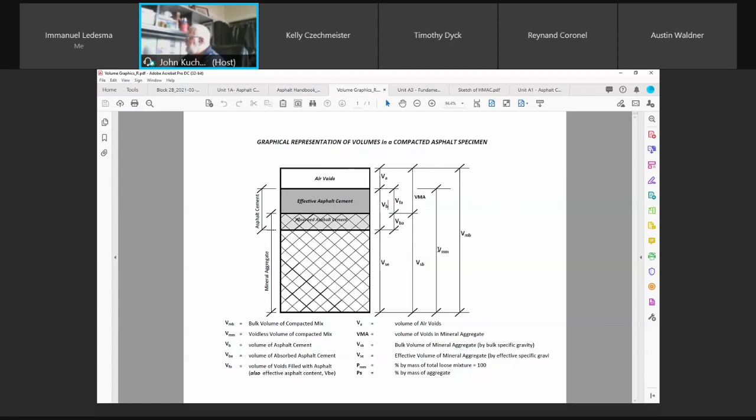Okay, so we're kind of looking at it - it's sort of the same type of matrix that Portland cement would have. You're going to have aggregate, you're going to have cement paste, and you're going to have air, pores, voids in concrete.

For asphalt, it's very important - the aggregates, again like Portland cement, are key. If your aggregates for asphalt cement are garbage, your mix is going to be garbage, it's not going to perform. We're going to be looking at the proportions of aggregate in an asphalt mix versus the proportions in the Portland cement mix - they're actually the opposite.

Remember, we've always strived for more coarse aggregate in Portland cement concrete than fine aggregate. For asphalt, it's flipped around - you're going to have less coarse aggregate than you will have fine aggregate.

It wasn't ideal to have crushed, sharp, angular particles for Portland cement concrete because it's a harsher mix. It would need more water for workability and more paste, so it didn't really contribute that much to compressive strength. It might have given you a little bit better bond between the aggregates and the cement paste, but it was a harsh mix, so it's not key to have sharp, angular, rough textured aggregate in Portland cement.

However, for asphaltic pavement concrete, you do need that. If you don't have sharp, rough, angular edges and aggregate in a hot mix, you're not going to have a stable mix - it's garbage. So again, now we're looking at something a little bit different as compared to Portland cement.

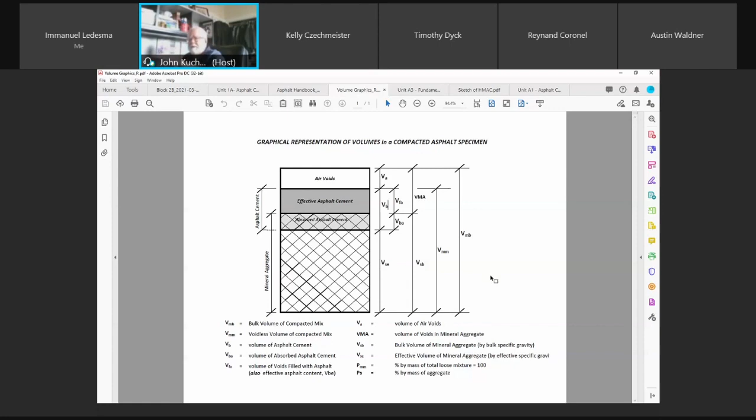We know essentially the two ingredients, aggregates and asphalt cement. So let's look at the asphalt cement. Any questions so far? Okay.

There's a fair amount of history, just like there is in the first use of Portland cements way back in the late 1800s. Same with the asphalt cements, the bitumens, the binders. Goes way back to the Greek days. There's a little bit of history on it, but I'm not going to get into that because you can read that on your own.

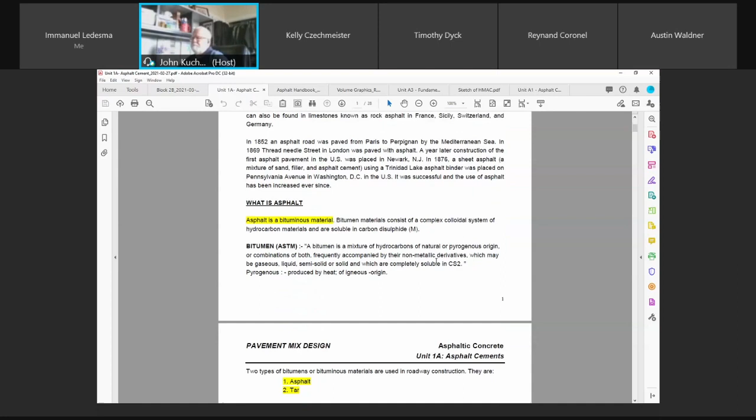But there are various definitions of asphalt. It's a bituminous material, or bitumen materials, if you want to call it that. They're made up of hydrocarbons, byproducts from the distillation and refining industries of crude oils. Here is an ASTM definition.

Tars were originally used way back, but now that we can obtain asphalt cements from the refining industry or distillation process of crude oils, we draw off different types of lubricants and petroleum products, and then we're left with the sludge, the residue, bottom of the barrel, as they're sometimes referred to, because that's what it was. And that is asphalt cement. We can add certain solvents to it and make it better to our liking, and we'll get into that.

So if you look at an ASTM definition, it's a black to dark brown solid or semi-solid cementitious material. We refer to it as cementitious because it is a cement, asphalt cement, which liquefies when heated. You know that your motor oil, if it's really, really stiff on a cold day, if you warm it up, it's going to be less viscous. It's going to flow more.

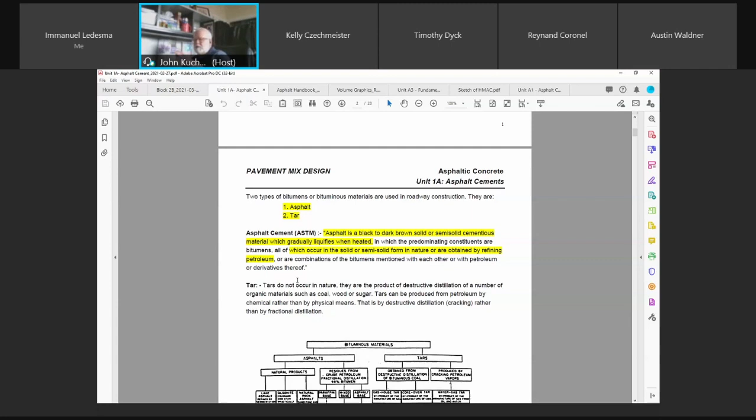Now that we can refine our crude oils, we can make and adjust the properties of the asphalt cements. This is just a little flow chart as to what happens. Don't worry about it, just for your need. Okay.

Asphalt cements. Before the advent of the petroleum industry, tars were the most common type of bitumen used in roadway construction. Okay, bitumen. In North America, asphalt cement is one of the refined byproducts from crude oil. And that's one of the things we do when we're refining crude oil for our fuels, gas, our diesel fuels, our naphthas, lubricants, oils for the industry. We're left with the residue.

Asphalt cement can be obtained from two main sources. They occur naturally, and as we said, we're obtained by refining petroleum. This is just a little bit of statistics. This could change, obviously. We know that we use a lot of bitumen or asphalt cements in paving, roofing materials, your shingles, any asphaltic shingles that you use on your roof. Okay, obviously we use that. We use the crudes and we use it to make shingles.

As a matter of fact, we're going to look at the City of Winnipeg specification now for asphalt cements and asphalt as we did for concrete, Portland cement. And now, as of a few years ago, the city allows a certain amount of asphaltic shingles to be used in asphalt.

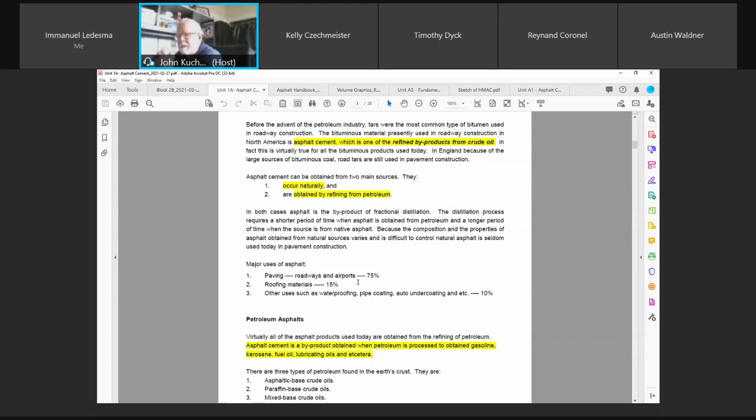And I noticed in that clean aggregate, after we withdrew—as you guys that worked in the industry may say, as we did the burn off, well, back then we used trichloroethylene, we dissolved the asphalt cement, we're left with clean aggregate. There were little round rubberized pellets. The consultant failed to tell me at that time, when we sampled the asphalt, that it was a recycled mix.

And in it, they had crumb rubber, keeping it out of the landfills. Why not use it? There's been some research done, and even some applied research projects, your group as a matter of fact, where they used crumb rubber in Portland cement concrete at a certain percentage before it became detrimental to the performance of the concrete. But if you can use a certain percent and it doesn't take away from the physical properties, why not use it? Why not bury some of it in the C base? Why not bury some of it in the A base?

Done that. We've done that with colored glass. Highway 52, between Highway 59 and Steinbach, as you go through Mitchell, there's a section of pavement where, when I was with highways, we actually buried 25% colored glass into the C base. Behaves excellent. Why not? Glass is one of the biggest culprits as far as trying to keep the environment clean, because it doesn't decompose. So crush it, bury it in the C base. If it has no detrimental effects, why not?

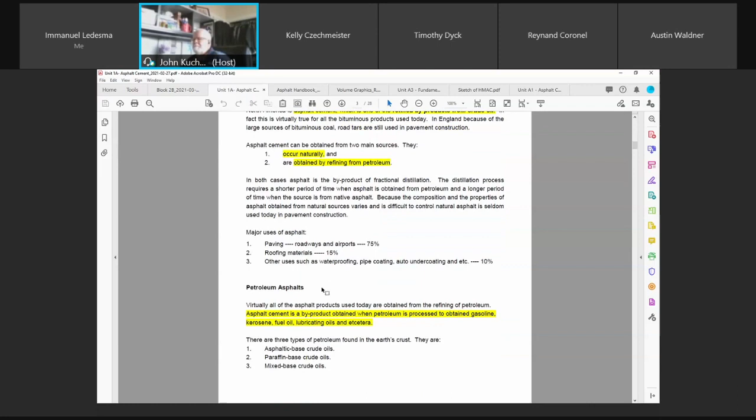Okay, so same with this. So we're looking at various products, like asphalt shingles. Any questions so far?

Virtually all the asphalt products used today are obtained from the refining of petroleum. Petroleum is processed to obtain gasoline, kerosene, fuel oils, lubricating oils, and other products. I hate the term et cetera, because what does it mean? Other oils, other lubricants. Any questions so far?

There are three types of petroleum found in the Earth's crust. Not too worried about this right now.

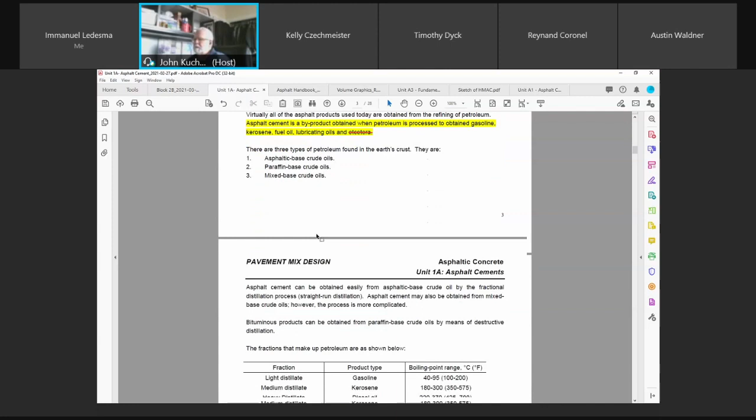So it's called fractional distillation. If you went to a refining plant, you'd see how they heat the crude, and at various temperatures the byproducts are driven off or pulled off. This process works with heat and boiling. Between certain temperatures, say 40 and 95, you're going to get your gasoline coming off. Kerosenes need a little higher temperatures. So when you draw off all your products - your lubricating oils, your kerosene, your naphtha, your diesel oils, your gasoline - you're left with the residue. We're left with the junk, the bottom of the barrel, the guck.

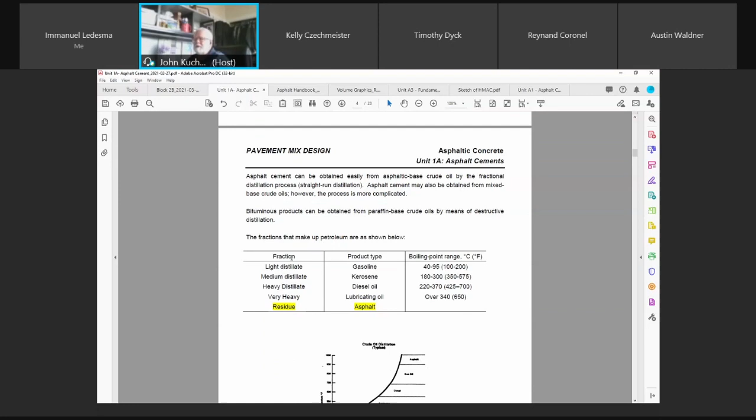Okay, don't use that term - it's residue. And it's asphalt. That's what it is. Take all these off, and we're left with that, and we find that it's got cementitious properties. This is just a chart that tells you the temperature rise. You can see here that at various temperatures, various hydrocarbons are pulled off.

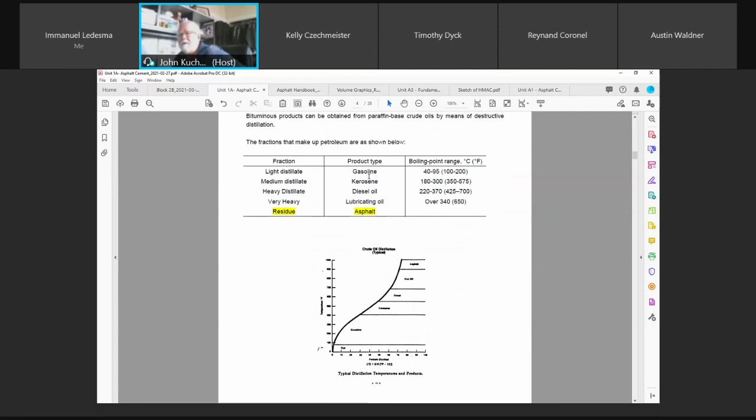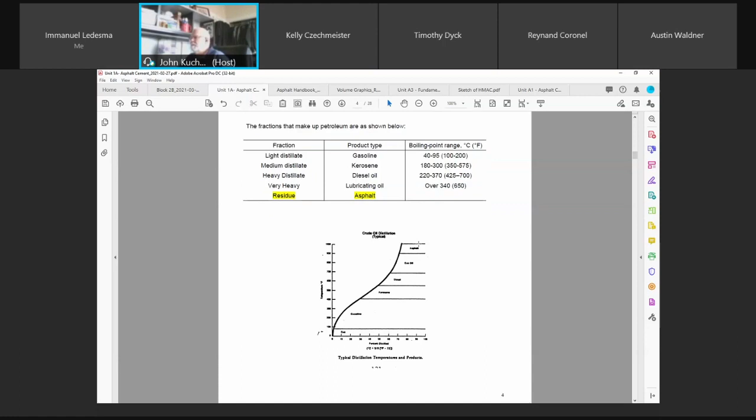And as a matter of fact, some of these are going to be used with our asphalt, and we're going to call what's called cutbacks. We're going to be adding solvents. Gasoline is a solvent, kerosene is a fuel but it's also a solvent. We clean lots of stuff using gasoline - great cleaner, stinks like hell, but great cleaner. Kerosene for burners and heaters, diesel oil for diesel fuels. So we can actually use these solvents and add them to the asphalt cement, and we can change its viscosity, its properties, and then we make a product that we need for various applications in the road building industry. We'll come up to that as we go.

Again, here's a little schematic of refining, just taken out of the asphalt handbook. I had just mentioned something in the asphalt handbook - stop here for a minute, I'm going to pull something up here now.

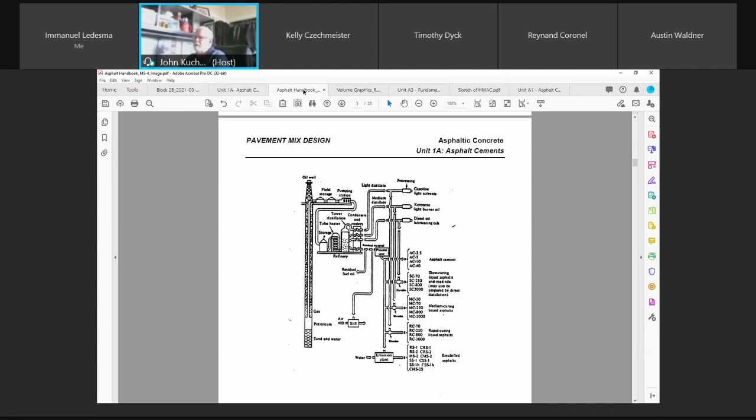Let's have a look - if you get a chance, this is the asphalt handbook, the one I asked last year's students to get, put out by the Asphalt Institute. It's the MS4 series. I have a copy of mine here, but this is it, I just took a picture of it. There's about 800 pages in this textbook. It covers everything from the cements to the aggregates, to the physical properties of aggregates, to the mix designs - whether you're going to use the Superpave mix design method, the Marshall mix design method, the Pavement Mix Design method, or the Hubbard, whatever. It covers maintenance, it covers design.

So this handbook, the latest edition is the 7th edition. Unfortunately, I don't think the Asphalt Institute gives students discounts, but they may. If you were at Red River College, they have this one in the library. But I think last year - Ray, did you buy this book by any chance?

Ray, can you hear me? No, it did not. Okay, it was the year after. I guess I specified last year to buy it, and this year because of it going online.

It is an excellent book, just like the CSA standard for concrete. This one here is also good. A lot of the DOT agencies in the States have adopted their design procedures and construction standards based originally on the Asphalt Institute. Our next design will also be based on the Asphalt Institute. If you get a chance to get a copy of this book, or see it in industry, by all means purchase it from the Asphalt Institute. It's about 180 bucks maybe, a little pricey, but well worth it.

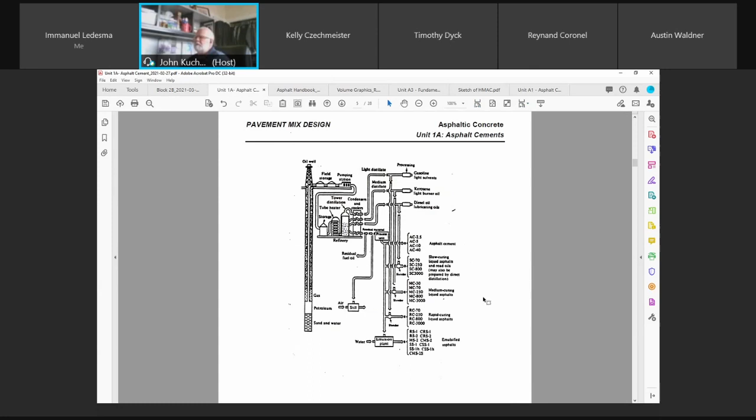Okay, there it is, so we'll go back to this, which is taken out of that handbook. It's just a copy of it.

We're going to get into a little bit of the specifics here on asphalt cement. I'll try to go through it a little quicker because there's a fair amount to cover. There are 3 broad phases, but it's a complex structure of carbon and hydrogen. That's essentially what it is.

There's the asphaltenes, the resins, and then the oils. They give you an idea of the ratio, but as long as you know the asphaltenes, resins, and oils, it's basically a complex structure. We're not going to get into the chemistry of it, that's not what we're doing.

Now, there's a couple of key properties of the asphalt cement that are very important when it comes to pavements, and that's ductility and adhesiveness.

$120 on the website. Good. Okay, I'm way out to lunch then. It's not too bad, 120 bucks. Asphalt Institute. Nice. Okay, good, thank you for that.

So can anybody give me 1 or 2 words to describe ductility? What does ductility mean? Anybody? Ray, you're the expert, how would you describe ductility? Kind of like workability, yes. But if steel is ductile, what can you say if steel was ductile? Deform, right, deformation, elongation, so those are key. The adhesiveness is obviously how it's going to bind with the aggregates. Deformation, elongation, and its ductility - what's it like when we're talking about ductility?

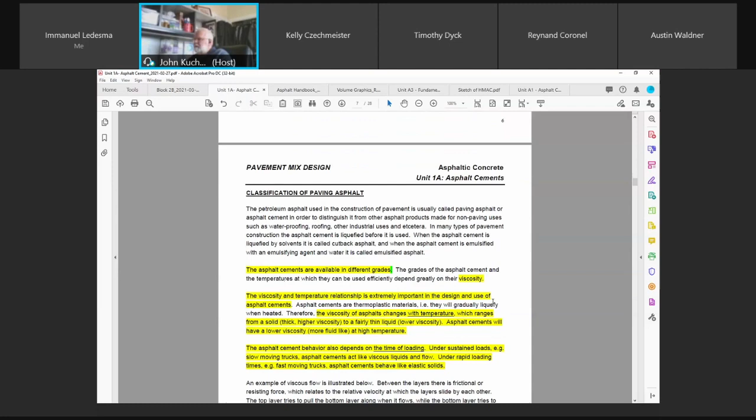I think I'm going to ask you guys about viscosity. If your viscosity is high, is your asphalt cement harder or softer? Would that make it softer, that it could flow better? No - harder. See, a lot of people think that a high viscosity means more fluid. It doesn't. It's a common error. Most people think, yeah, it's thicker.

Viscosity of asphalt cements changes with temperature. It ranges from a solid, thick, higher viscosity to a fairly thin liquid, lower viscosity. Asphalt cements will have a lower viscosity, more fluid-like, at high temperatures. So that's something a lot of people get confused on. Higher viscosity means harder, lower viscosity means more fluid.

Viscosity is defined as the resistance to flow - by gravity. One is actually by gravity, and one would be by imposed loadings. There's two different types of viscosities: we look at dynamic viscosities as one. Like 5W30 summer versus 0W30 winter. Exactly - so in wintertime, your viscosity is higher, not lower.

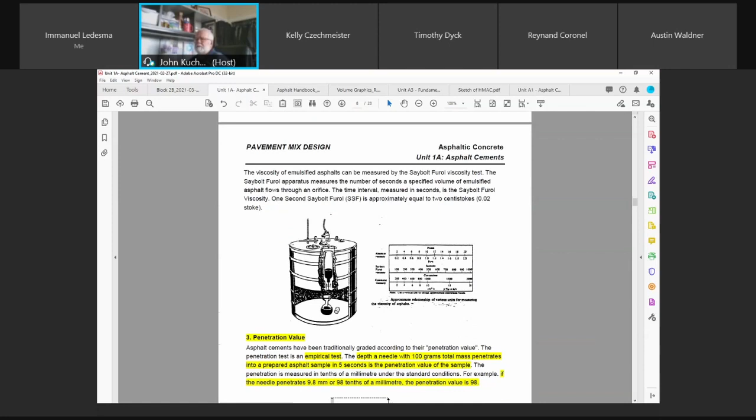Note that the absolute viscosity of a liquid, measured in poises, and its kinematic viscosity, measured in stokes, have approximately the same value. Viscosity after aging is also used to grade asphalt cements. These are the two main definitions, dynamic and kinematic. We want to know what those viscosities are so we can grade our different asphalt cements, and there are numerous ones out there. This just tells you how they do it - don't worry about it, it's a test procedure. I'm not going to ask you to memorize these test procedures.

So we said that viscosity was one way to grade the asphalts, along with penetration. This is one of the tests you're going to have to know why it's done, but you don't have to know the procedures. We would if we were doing a lab, and we're not doing this lab in the virtual labs - we do it during the physical lab.

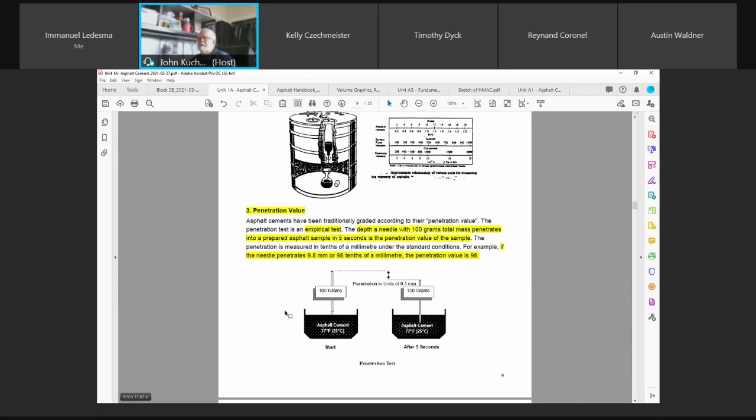This is a form of grading the asphalt cements, and you have different values. You can have what's called a 100-200 penetration grade asphalt, or a 200-300 penetration grade asphalt. The city kind of goes in between with the MI, and they have a 150-200. So now they're sort of blending, and we'll get into that a little bit more.

Essentially, it was a test derived as to how far a needle penetrates the asphalt cement at a certain temperature, with a certain amount of mass on that needle, pushing it in over a certain time. That's the penetration test, and that's how it was graded. So it's an empirical test.

The depth a needle with 100 grams total mass penetrates into a prepared asphalt sample in 5 seconds is the penetration value of the sample. So if you looked at this little sketch, you've got asphalt cement at 25 degrees Celsius. Bring your needle down, it's 100 grams, let it fall into the heated asphalt cement, and it's going to penetrate. The number of millimeters it penetrates is recorded, in tenths of a millimeter.

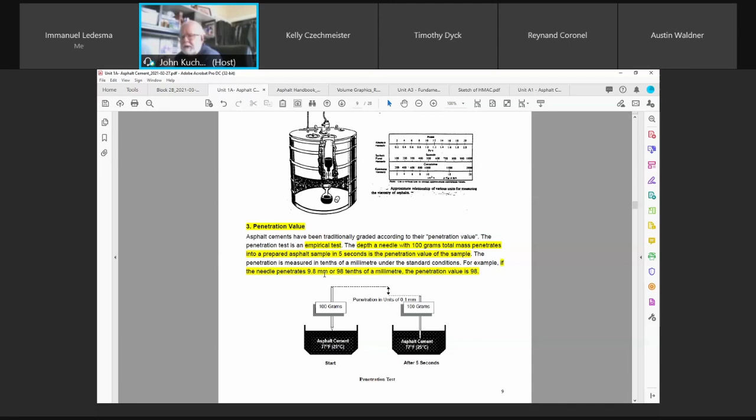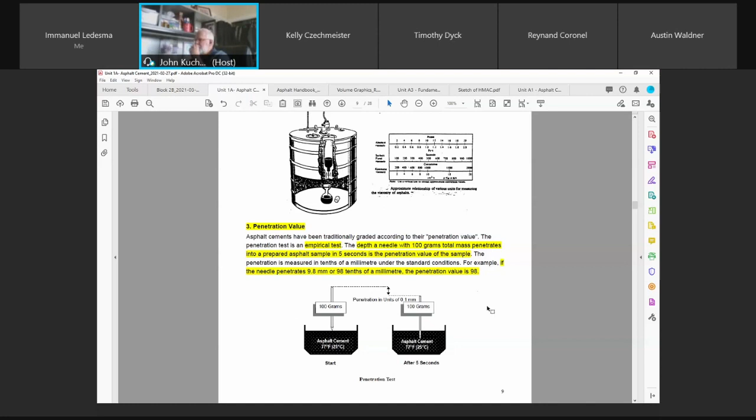There's a flash point that we're going to look at later on. Solubility. So there's various tests that you have to run on these asphalt cements from a quality control point of view, no different than what you would run on your Portland cements. The fineness, loss on ignition, the soundness, strength of the asphalt cement.

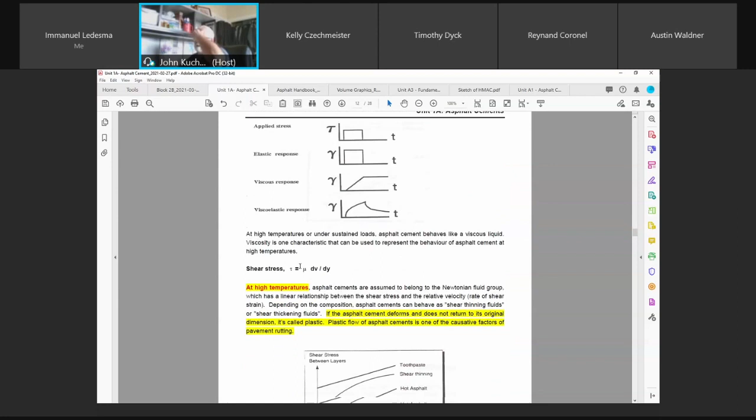It just kind of gives you an idea what I'm going to. A couple of key points here, though, at high temperatures. This is now we're going to just look at the asphalt cements and how they behave. If the asphalt cement deforms and does not return to its original dimension, it's called plastic.

Plastic flow of asphalt cements is one of the key factors of pavement rutting. And you've seen pavement rutting, eh? When you're driving down the highway, especially at areas where there's lots of stress, at traffic lights or at stop signs, one of the worst areas was on the west perimeter, just as you're approaching McGillivray, from the south, you had ruts, the impressions of the wheels. In other words, the asphalt cement was mounded up between the wheels. It's rutted. And that's due to a couple of factors, but one of the key is that it's in plastic.

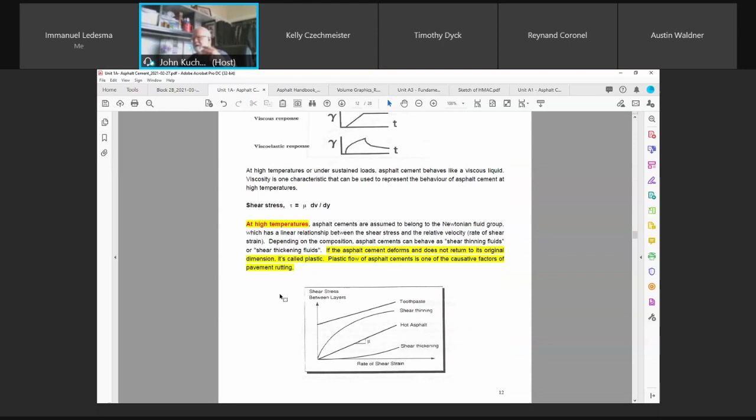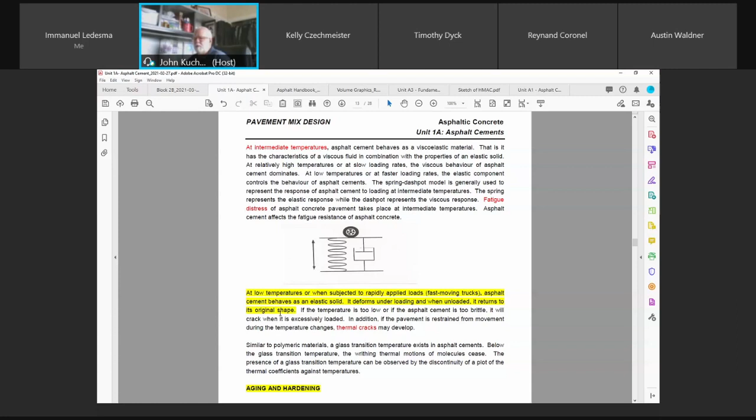So we have various products. So at high temperatures, you know that, well, it's in a plastic state. At intermediate temperatures, more of a viscoelastic, if you want to call it. At low temperatures, or when subjected to rapidly applied loads, fast-moving trucks, asphalt cement behaves as an elastic. It deforms under loading, and when unloaded, it returns back to its original shape. So plastic, it does not. Elastic, it does. That's what you want. You want it to return back to its shape. Make sense?

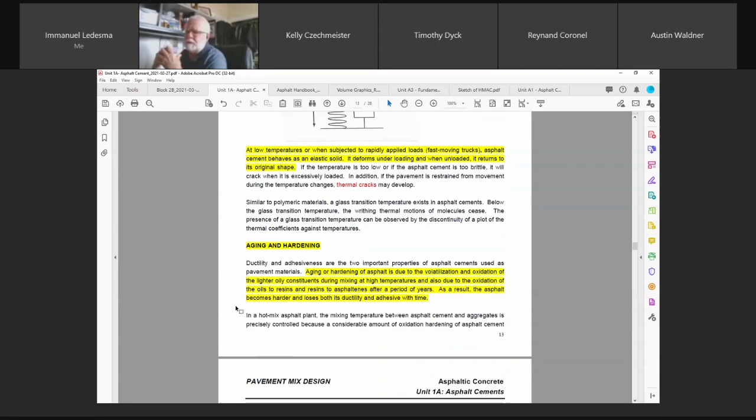So these are all the things you have to consider when you're going to be designing an asphalt pavement. And some of the old methods that we've had are sort of gone by the wayside. We still here in Winnipeg and Manitoba, the province, use Marshall designs of performance grade, penetration graded asphalt. Now I know MI is moving to the Marshall method of design, but using performance grade asphalt cements. So in other words, they're using performance grade to grade the asphalt under that, and we'll see why.

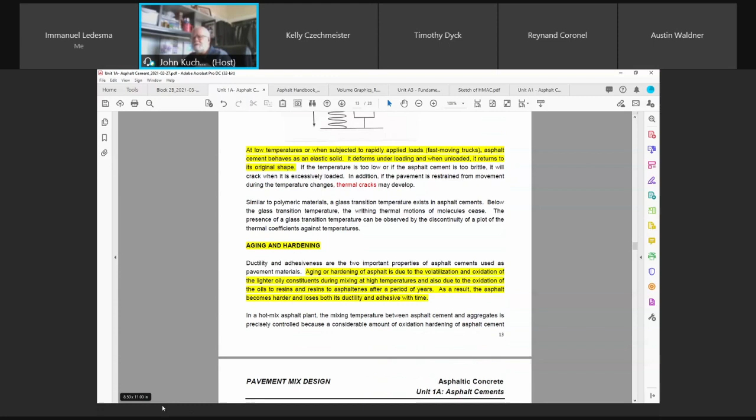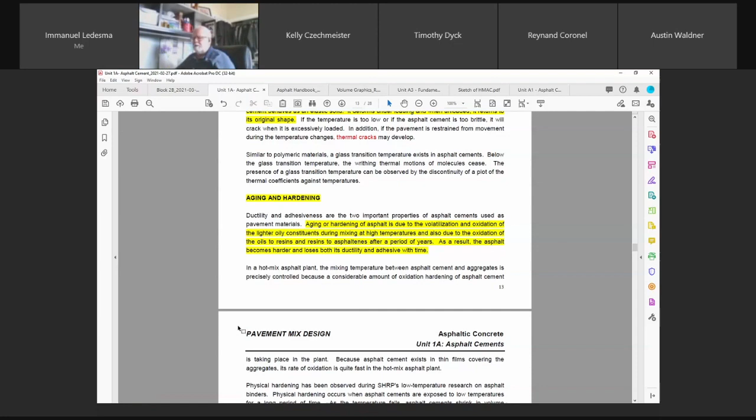Whereas the penetration and the viscosity, the old way, didn't take into consideration the surface temperatures of that pavement, whereas the performance grade will. It's going to look at the minimum and maximum temperatures that those pavements can undergo. We may use a 150, 200 pen grade in Winnipeg, and you're up at Thompson, Manitoba, and you're still using a 150, 200 pen grade asphalt. Well, the service temperatures in Thompson or in Churchill throughout the year are totally different than in Winnipeg, or even Grand Forks. You got to take that into consideration, the service life of your pavements.

Okay, well PG, performance grade, straightforward. 64 and minus 22, what are they? Well, it's the average 7-day maximum pavement design temperature, and minus 22 is the minimum 1-day minimum temperature. So in other words, you're designing a pavement using an asphalt cement that has the capabilities of 64 to minus 22. Now 64 is not that high, but it's an average.

So now when you're in Thompson, you might say, okay, my PG 64-22 may not work because the average 7-day maximum in Thompson may be a lot less. Maybe it's only 50, just guessing, but okay, so that's what it means.

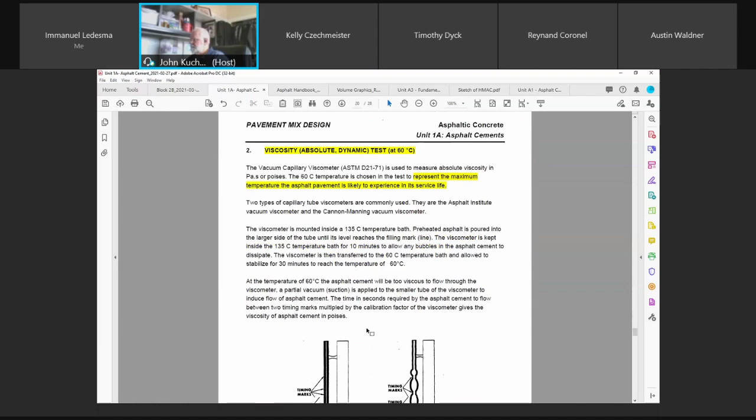Remember, I said, okay, we've got asphalt cements and they have certain properties. Maybe we can't readily use them. Viscosity might not be there for the type of pavements, so we can liquefy, we can change the viscosity. One way of doing it is by heating it, obviously, but that's only going to help during the temperature increases. So we want to cut them, change the viscosity so that temperature may not have so much of a bearing on it.

If your oil was too thick, your cake batter is too thick, what do you do? You add water, changing its viscosity. Well here, because we're working with asphalt cements, adding water is one way, when we're making emulsions.

And we'll talk about that, but the other way is taking those solvents that we let off during the refining, take some of that gasoline, some of that kerosene, some of that naphtha, and mix it with your asphalt cements and you change their viscosity. They're easier to work with at certain temperatures and certain conditions. So it's called liquefying asphalt cements, or cutbacks. We're cutting back the viscosity.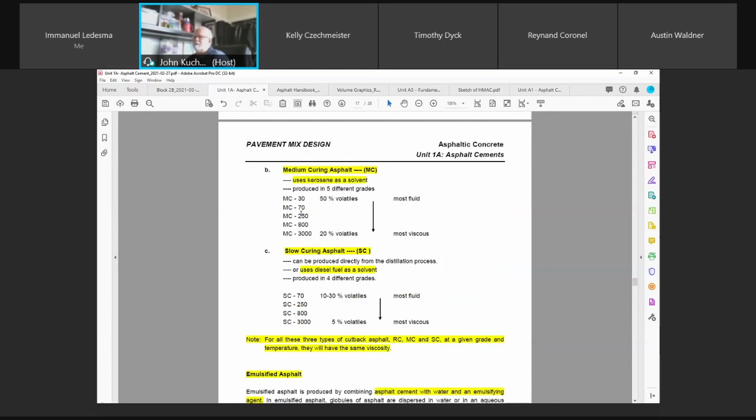Then you use that emulsifier to break it down, you want to change the viscosity. There are some advantages to using emulsified asphalt versus rapid cure. There's what we call flash points, or the breaking time. At a certain time after we place this asphalt cement, the solvents will flash off, the volatiles evaporate, and you're left with that product. You use it to place it, to work it, but after a while it'll evaporate, it'll flash off, and there's a time noted for that, when the asphalt actually changes back to viscous.

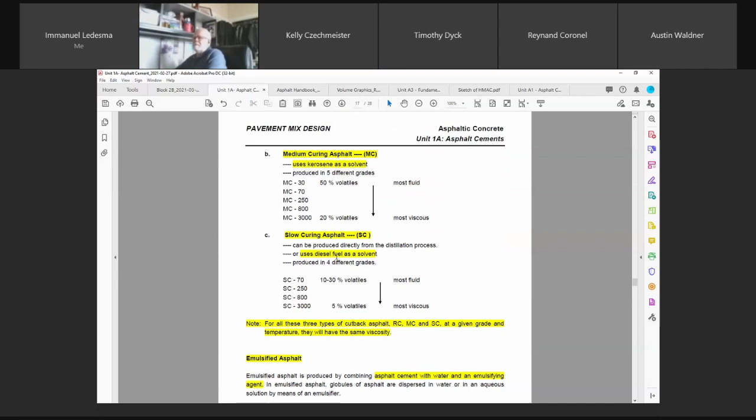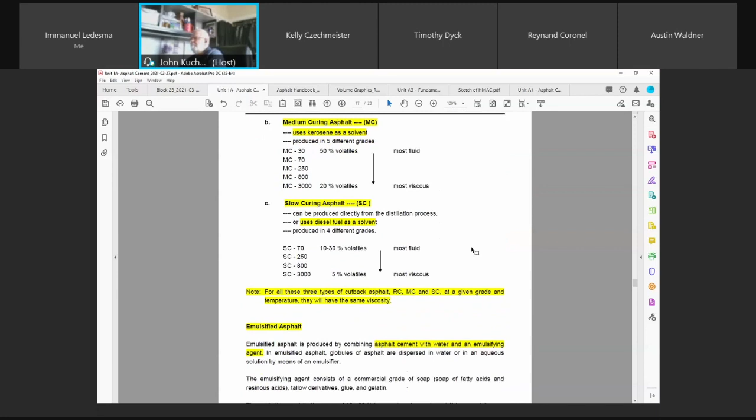So if we're using emulsified asphalts, which one would you rather be standing beside all day long? You're laying down tack coat or prime coat. Would you rather use an emulsified asphalt, or one of these rapid cures, medium cures, or slow cures? Anybody? Why, Margo?

Because it's not as toxic or as smelly. You got it right, exactly that, Margo.

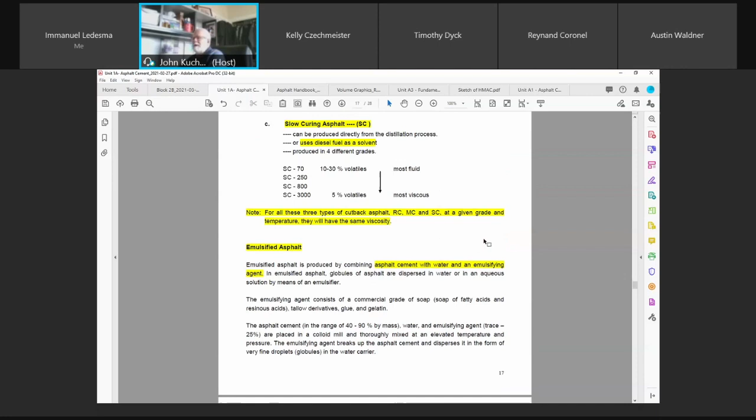If you were on a paving crew, when those solvents flash off, gasoline, after a while if you hang around it too long you'll get headaches because it's flashing off. Well, emulsified asphalts are basically water-based and soap-based, they're not going to harm you. They are more environmentally friendly, so there is a push now. Plus, what happens if you heat solvents up to such extreme temperatures? What's the chance of happening?

Ignition, fire? Exactly, so we're coming up to that. There are three main reasons why emulsified asphalts are more superior. One is environmental toxicity, more environmentally friendly. One is that there's less chance of ignition, it eliminates ignition due to an open flame or a spark off a truck or machinery. And the other is that since they're emulsified and water-based, your aggregates don't have to be bone dry, they can be damp or cool. So working with emulsified asphalt cements makes a lot more sense.

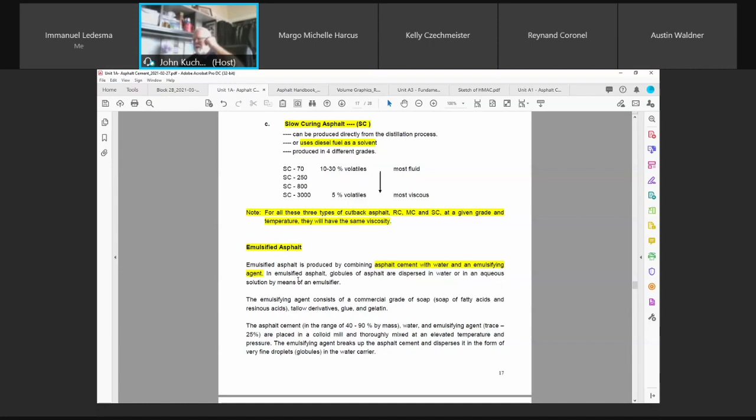But we'd still use both. Yeah, thanks Margo, very good.

They just talk to you about the percentages, but the emulsifying agent breaks up the asphalt cements and disperses it into a form of very fine droplets. That's essentially what we're doing, we're trying to change its viscosity. Don't worry about the cationic, anionic, and so forth.

But this is important: the time required for the water to evaporate, for the asphalt particles to recombine into a continuous film of asphalt, is called the setting time or breaking time. Any of you that have worked on an asphalt paving job will see them laying tack coat down before they pave the asphalt cement. They've got a distributor truck with spray bars on the back, and it rolls out a layer of tack coat.

Essentially, it could be a cutback, or it could be an emulsifying agent, an emulsified asphalt. So you've got to give it some time to break or set up. What happens is, whether it's an emulsified asphalt where the water and emulsifying agent evaporates, or a cutback where the solvents flash off...

Then the pavement goes on it. You don't want the pavement to go over wet emulsified asphalt or cutbacks. It's got to flash off and just become tacky. You're creating a glue, if you want to call it, an adhesiveness.

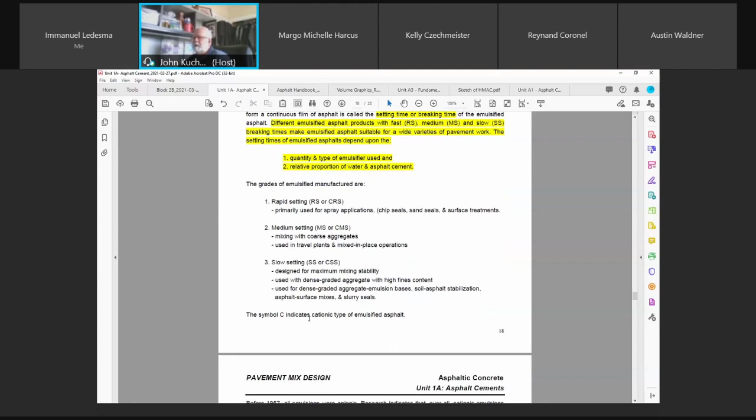Here's the grades of emulsifier: rapid setting, medium setting, slow setting. And the C, if you saw that just tells you whether it's cationic or emulsified type.

And here's the three ingredients, and we're going to take a break here right away. We'll have to try and finish off this next week. I'll try and bring that up with the aggregates.

Advantages of using emulsified asphalt: they can be used either with cold or hot aggregates. Perfect, eh? They can be used with aggregate that is dry, damp, or wet. And it eliminates the fire, toxicity hazards, and the environmental pollution of cutback.

Even when you're not using these cutbacks, just working on an asphalt paving crew all day with the hot asphalt, in the summertime it's a heck of a job to work on. But in the fall, October, November, if you're lucky to pave that late, you'll see most of those workers on a cold October day huddle close to the mat because the temperature coming off a hot asphalt mat, you can feel it. It's a bugger in 30-degree weather during July, but it's a blessing in October, different than built-up hot applied roofs.

Why doesn't the paving crew like using it, Clive? You talking about emulsifieds? I've got a question here. Go ahead, Clive. Let everybody know. Okay, harder to work. Are you talking about the emulsified asphalts?

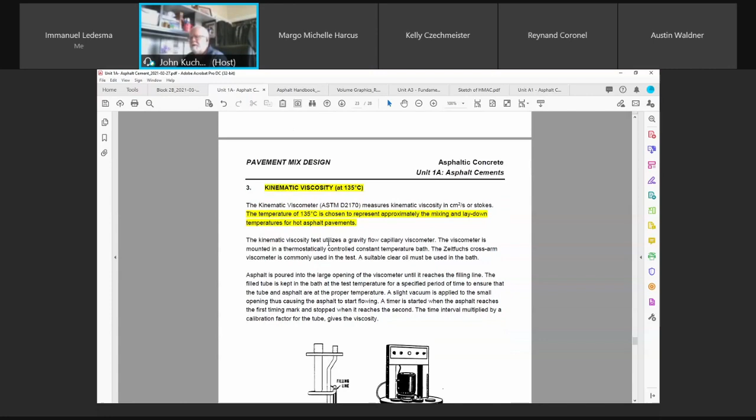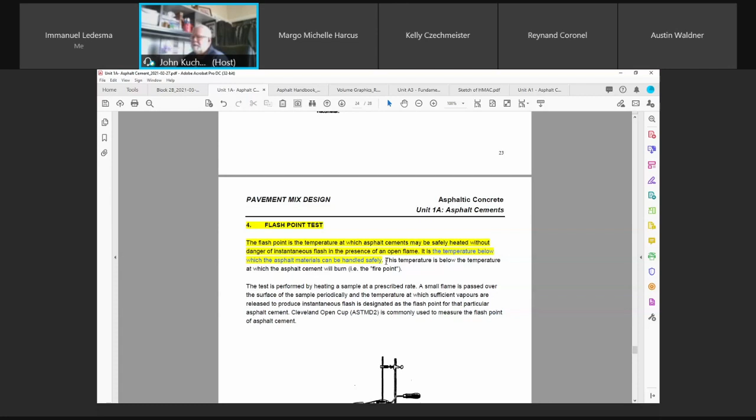Flash point is the temperature at which asphalt cements may be safely heated without danger of instantaneous flash—there's an open flame. If there's no open flame you should be okay, but you never know: a spark, somebody hits the tailgate of their truck or whatever. So it's that temperature, flash point, okay.

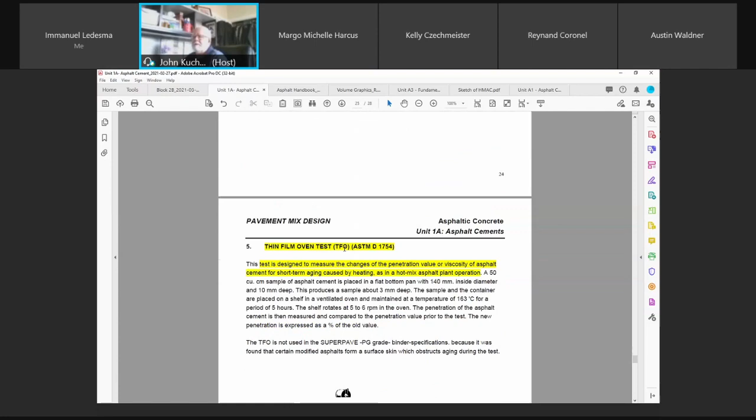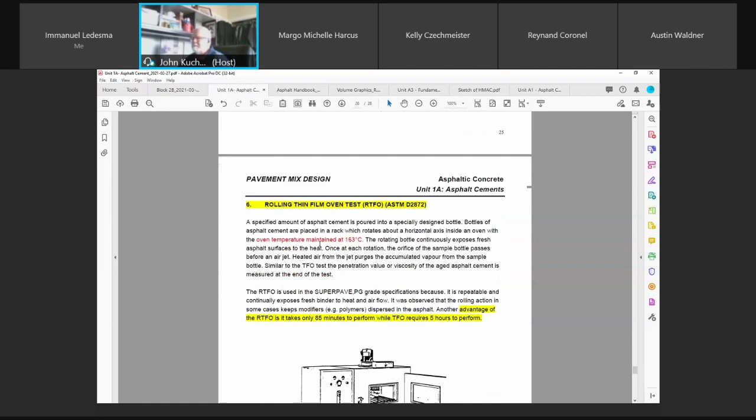Thin film oven test, and the rolling thin film oven test, which is just a different procedure but essentially the same test, for short-term aging. It simulates the heating that occurs at the plant, designed to measure changes in penetration value or viscosity for short-term aging. This is essentially the same thing but quicker to run—the other one takes a couple of hours, up to 5 hours, while this one you can do in about 85 minutes.

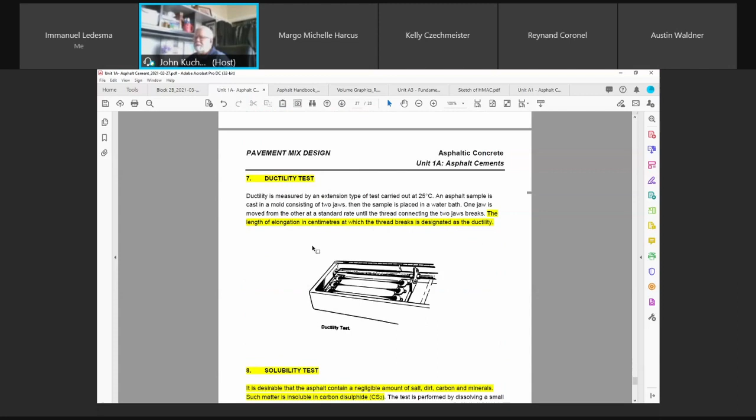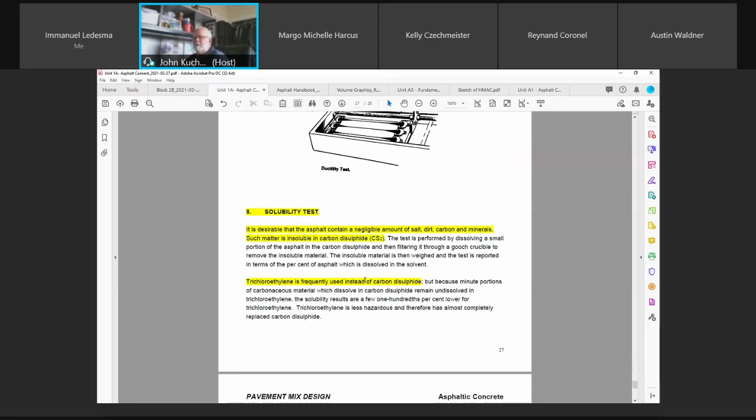Then there's the ductility test that measures the elongation. Solubility test: we use carbon disulfide to see what kind of impurities we have. We dissolve the asphalt cement and are left with impurities, so we can determine what the content is. And then the water and asphalt cement test—we know water sometimes gets trapped in with the asphalt cement.

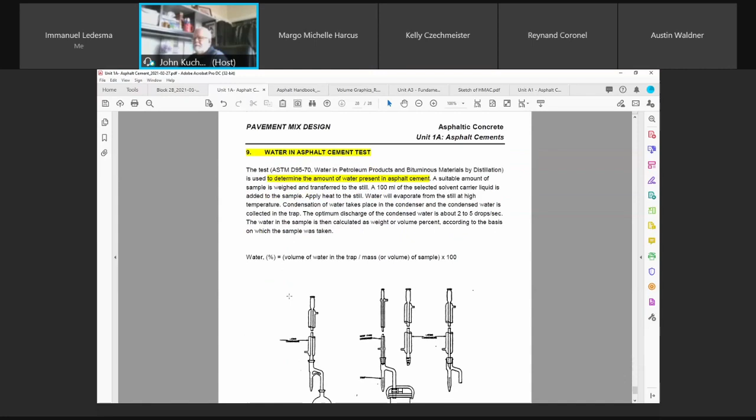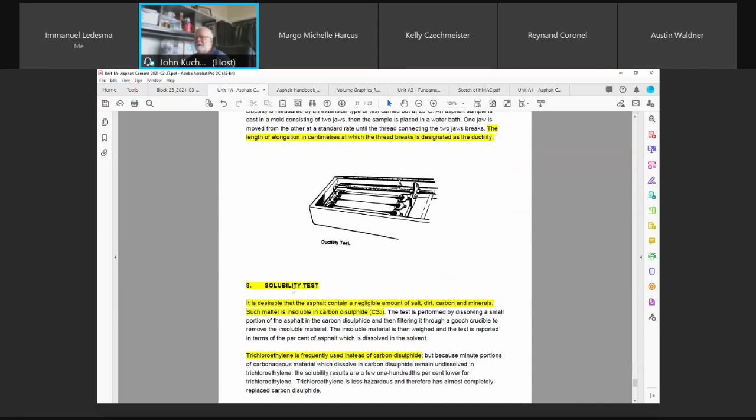Okay, so those are the 9 tests. Know them, and why we do them, but you don't have to know the procedures of how to run the test—that's not what we're here for. Just like there were the 6 tests the cement manufacturer had to do for Portland cement concrete, there are various ones here for quality control to ensure the asphalt cement you're selling, whether it's Husky or Esso or any of the other major oil producers.

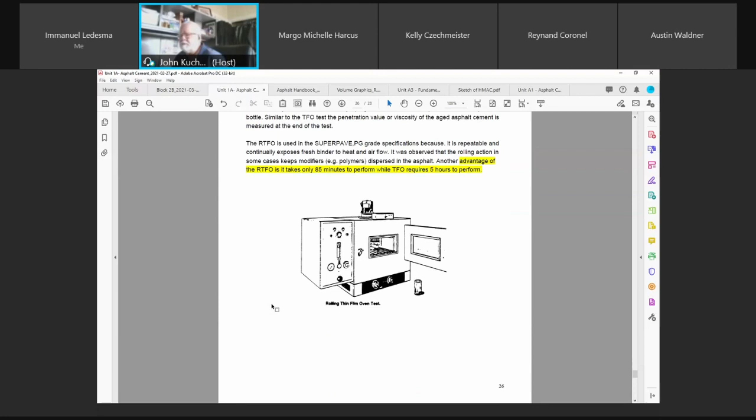It's 2:25. I want to go over the lab, and this lab will be aggregate blending, just like we blended concrete aggregate. This is going to be a little more fun because now you're going to be blending 4 types of aggregates instead of just 2. So let's come back at 2:35. I'll stop the recording, but leave everything as is, and hopefully we can go through that lab quicker since you're already experts on blending.

Any questions on the asphalt cement? I had to go through quickly, guys, we're down to the nitty-gritty here. We've got a fair amount to cover, and hopefully next year we don't have to compress these into 12 weeks—the 24-week course can stay at 24 weeks. So those of you that just want the 24 weeks, just don't graduate this year, and you can come back and have it in 24 weeks.

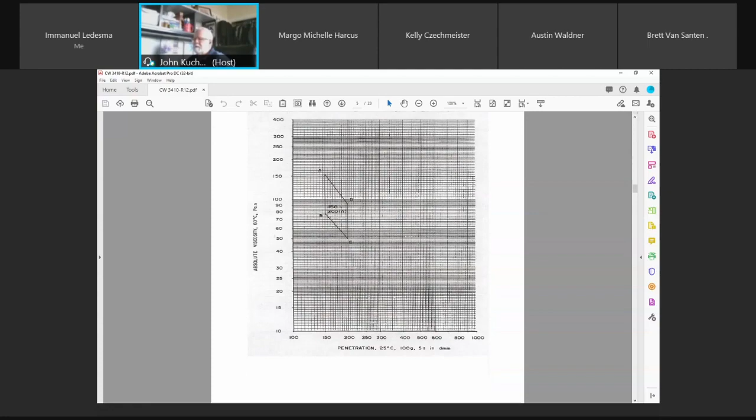They have certain tests on their AC, as we were referring to. There's the viscosity chart that the AC has to meet. And here's the revision, okay?

Blending of recycled asphalt shingles shall be during the production of the asphalt, and the mix produced shall consist of a uniform blend of all materials. It basically has to be shredded, has to be cut up quite fine.

A mix design statement, again, very similar to what's for concrete. What are the physical properties? This is kind of important.

You're going to have aggregate requirements, and they have various asphaltic types that they place in the city of Winnipeg. Most of it is type 1A. However, they can go to surface courses, and we'll look at that right away.

Once you determine the blend, once you determine this is the gradation that the asphalt has to be mixed at, section 6.3.1 gives you the plus and minus tolerance from that gradation. You're going to have a wide envelope at first, and your mix design has to meet in there. And once it's in there, say based on a blend of 50-50, 25-25, this is the grading. Now it's plus or minus from that grading. So now your envelope has become that much narrower.

So you can see down here, passing the 80 plus or minus 2. Now I want to bring your attention to something. The city of Winnipeg, I think, are a little bit, I wouldn't say backwards. And that is, they are using the Canadian metric sieve size for just about all their materials, which is not right.

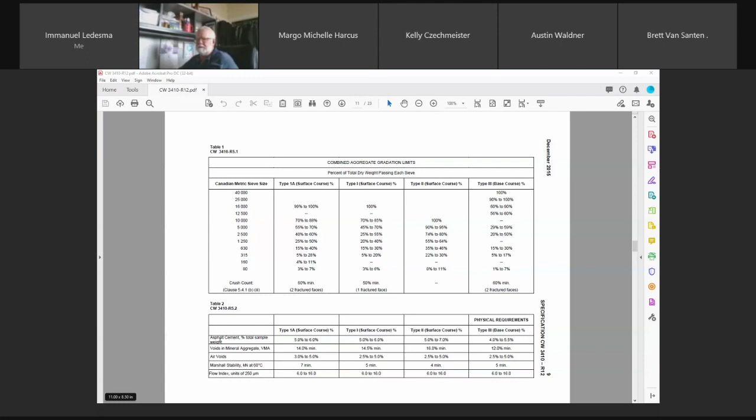And here's the other properties now that your mix design has to meet. The percentage, asphalt cement, percent of total sample weight or mass, 5 to 6.

Voids in mineral aggregate, remember we looked at that on our chart, the VMA, minimum 14. Percent air voids, you want 3-5% by volume.

The Marshall stability - we talked about compression strength tests for concrete and asphalt pavements. We talk about stability because it's an interlocking. We load the briquettes, so it's a cylinder, but instead of loading it this way, turn it in a breaking head and you load it this way. And flow is the amount of deformation at maximum stability.

So those are the key tests you're going to be doing. You're also going to determine the maximum density, but that is going to be a function of the mix. There's no spec for it - it is what it is. Design and mix to meet all the other properties, and density is going to be what it's going to be.

So here we're looking at the type 1A - this is what we're designing. You can find this specification under City of Winnipeg website, Standard Construction Specifications, under Surface Works, and it's 3410.

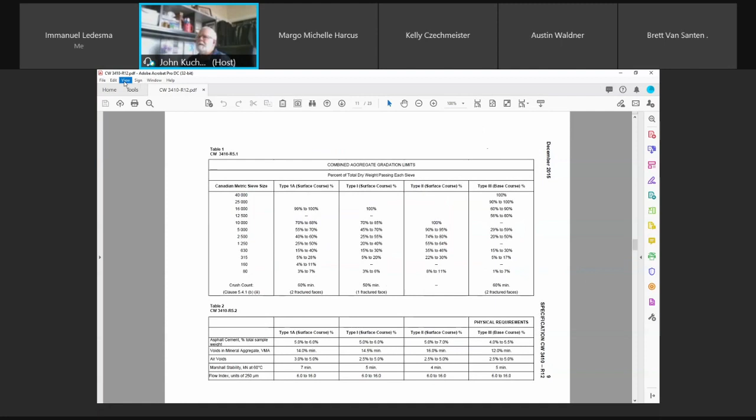And it gets into the actual base preparation and so forth. For now, we're just wanting to bring you the sieve analysis, so you could see that there was a sieve analysis - the grading limits given for type 1A surface course.

What I'm going to do now is turn to an example we used a few years back. Had we had this lab physically, you would have had 4 aggregates to sieve and determine the gradation. As I mentioned in the lab on Learn, it's donated from Maple Leaf Construction.

The coarse 16 millimeter crushed limestone aggregate is from their Stonewall quarry, as is the crushed chips or crushed fines. We refer to them as chips many times, and I'll try not to, but sometimes I will call it chips, but it's because it's bled off when they're crushing the coarse. When they're producing the coarse 16 millimeter crushed limestone - we call it 16 because that is the top size for a type 1A mix - they will take the fines off, the crushed fines.

The natural fines comes from Birds Hill - what they call Pit 63 on Garvin Road, in the Birds Hill area. And then the VMA sand. Now, there's no such thing as VMA sand - we call it VMA sand because it is a finer sand that controls the amount of VMA in your mix. So we just call it a VMA sand. But if you look at the grading, you'll find that it's very, very fine - it doesn't have to be very, very fine, but it's finer than their natural sand.

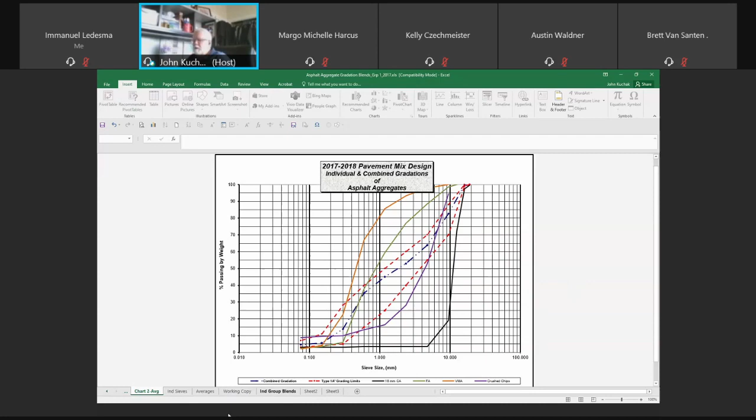If you look at the original, you're talking about 25 hundredths of a millimeter difference between 5 and 4.75. 2.5, 1.25, 630, 315, 160, 80.

0.005 millimeters difference. So really, when they actually write their spec, even for concrete, they don't follow the Canadian metric sieve size. They'll even state in their specification that the ASTM metric shall be interchangeable with Canadian metric, so that there's no discrepancy later. They'll say if you're testing against a 5 millimeter, it's the same as a 4.75.

It's just that if you're talking about oranges, let's talk about oranges, but once you start throwing in apricots and everything else, it's kind of confusing. So don't worry about this.

You won't have it. We physically did 1A, 1B - these are the groups that tested various aggregate sizes, then we took the average. These are the averages, just on the next spreadsheet.

You don't have this. So physically in the lab, every group would do 2 or 3 sieves, and then the average of 16 millimeter - see, these 3 groups did 16 millimeters, 1B, 1C actually did 16 and crushed. So typically you'd have to, then we took the average of those, so that was just to give us an average.

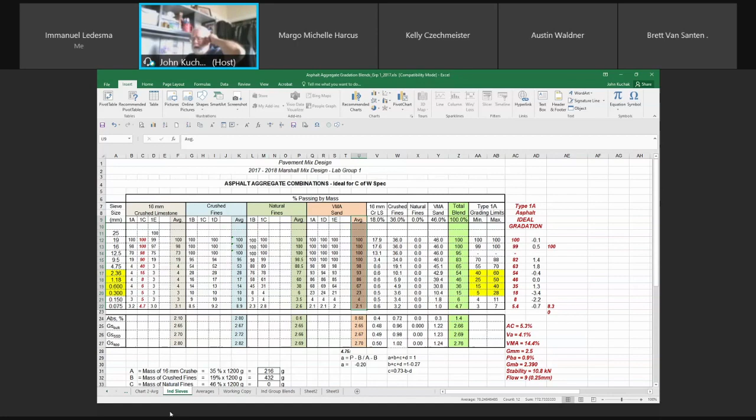So now we're just looking at averages, so you don't have to worry about individuals. Here you can see we've got the individual sieve analysis, and there's no spec for the individual.

CSA should actually have changed a little bit where they're now saying that individual gradations for the coarse aggregate and the fine aggregate in CSA can deviate from their individual ones, provided that a blended one combined meets the criteria for the concrete mix design. And this is what asphalt does.

I worked on one project where we actually combined 5 aggregates to meet a spec. We couldn't, so we had to bring in another bin, another conveyor belt, and we had to do a 5-bin asphalt mix. Here, this is a 4-bin asphalt mix, 16. So these are the individual gradings.

Once you have them, now we're going to shoot for a target. We'll fall in between here, but we want to shoot as close to this as we can. And this column, I just put that for myself - this gives me a plus or minus from the target. So if you look here at 53, you can see that I'm under 54 by 0.4%.

These are to 1/10 of a decimal, these are to whole numbers. I can change these if you want to make more sense.

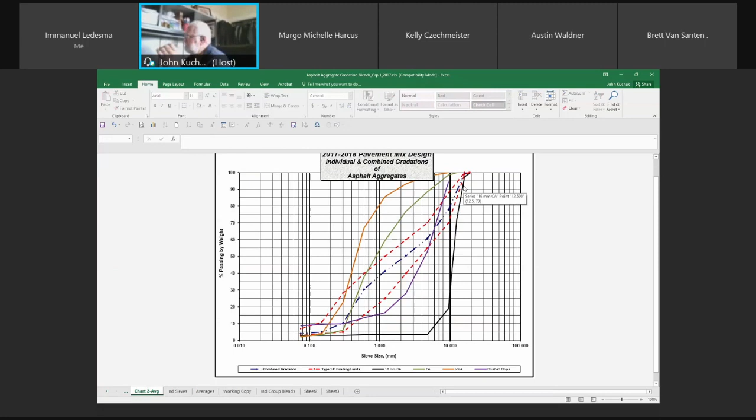If my air voids are low, okay, I want to get more air voids into my gradation, into my sample. And I've got fine aggregate. Okay, I've got the VMA sand, I've also got the natural sands. What should I do? Should I increase the amount of sand or decrease the amount of sand? Anybody? I want to increase my voids. So should I add more sand to my mix or less?

Decrease. Okay. The air voids will also be a function as to how much AC, asphalt cement, I'm going to use. So should I increase my AC also? Or should I decrease the amount of asphalt cement?

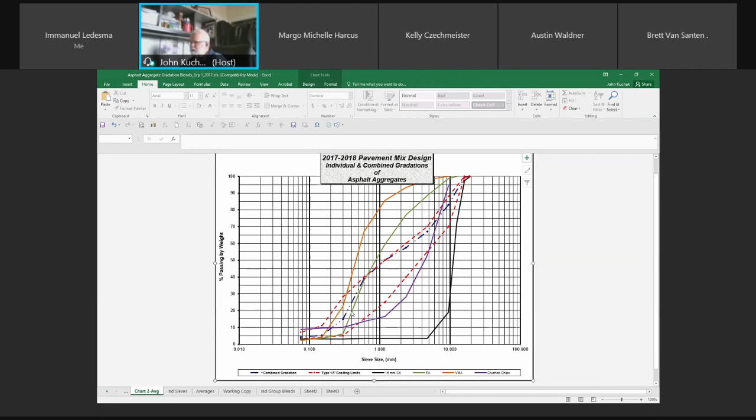Now 0.3 here, this is a critical sieve. You should try and be up a little higher on the 0.3. That's where that hump should come in, because that's what's going to give you your VMA and air voids. It's just something we know in the industry and from asphalt technology.

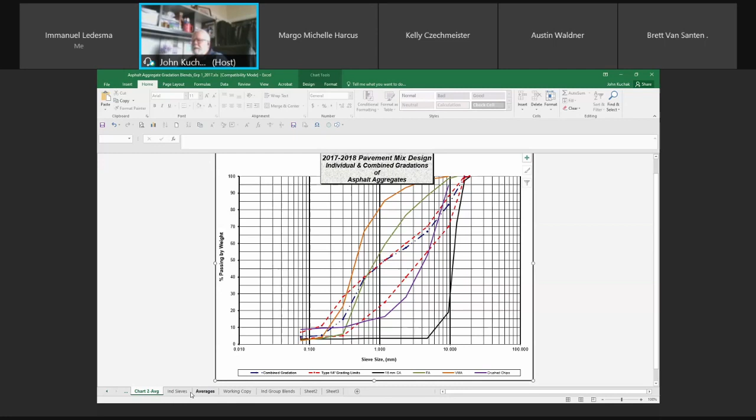Talk about 16 millimeter. Okay, Fabian. Yeah, you might be right, let's try that. So we're going back. Which one, okay, 16 millimeter. How much do you want on the 16 millimeter? You can use your voice, you guys. 13? Okay, we'll go 13 there.

And I'm still low by 6%. Where should I make my other adjustment? Crushed. How much, 6 crush fines? Okay, so give me 34.

But get as close as you can. The key sieves, okay, when we're going to be going with the mathematical formula for determining combination, say, on 3 aggregates. Your main control sieves are the 4.75 that are important, and for your additive, anything finer than 0.075. These are the 2 that you start off with as starting points.